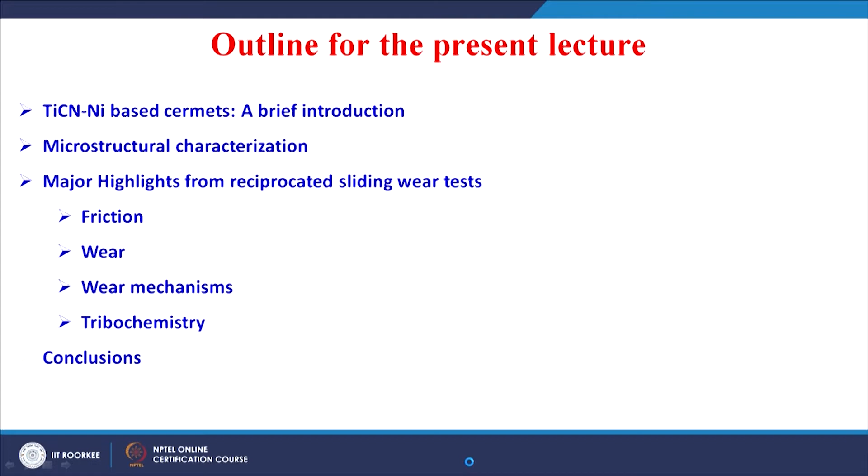So welcome all again. Today we will learn about the salient results of studies done on the tribochemistry of a particular cermet material. The outline of the present lecture: I will introduce titanium carbonitride based cermets with a brief introduction on their microstructural characterization, and then I will focus mainly on explaining the friction results, wear results, the dominant wear mechanisms and the tribochemistry involved in the wear.

Let us start understanding what is this cermet. Cermet is a ceramic with a metallic binder, so it is called a cermet. Several examples of cermets are used in engineering applications, like tungsten carbide cobalt cermet, aluminum oxide nickel cermet, zirconium oxide nickel, titanium carbide with nickel or cobalt, or titanium carbonitride with nickel. These are several examples of cermet materials used in engineering applications.

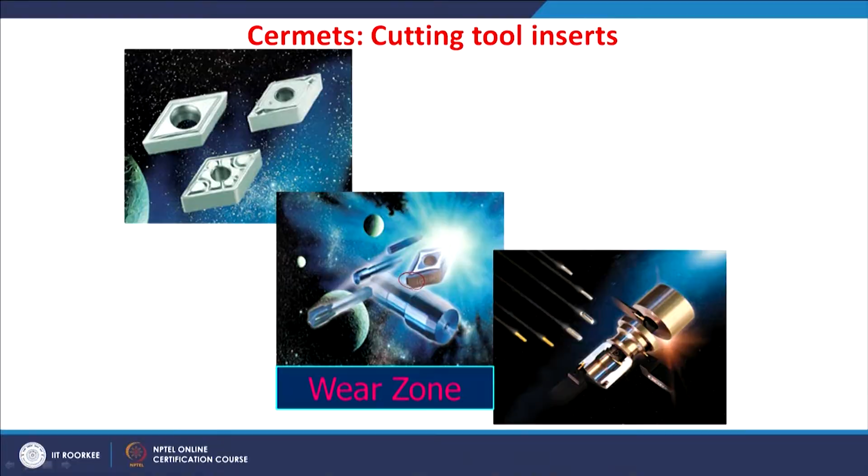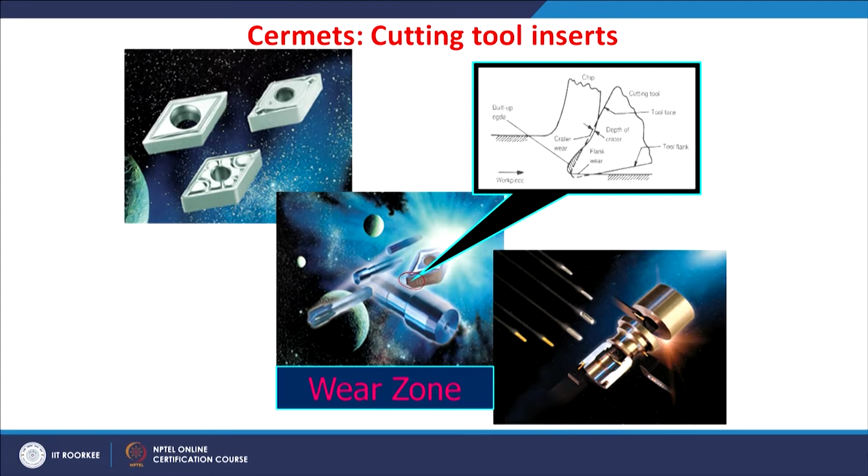Regarding engineering applications, these cermets are mainly used in cutting tool applications as an insert for the cutting tool. In machining, if you look at the tip or nose of the tool and the workpiece, there is a large amount of friction generated. This friction induces wear, but it also induces high temperature. So the friction-induced heat and the damage occur simultaneously and lead to material degradation. Particularly in cutting applications, the mechanisms shall be studied in the crater wear or the flank wear of these cutting tool inserts.

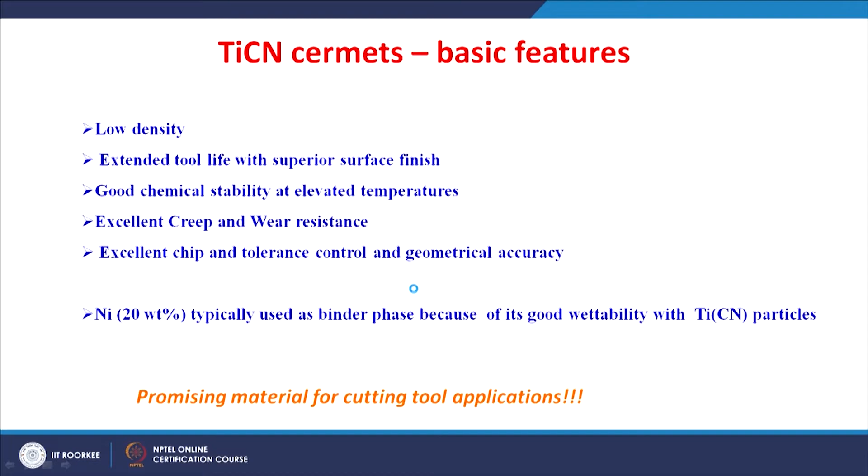Titanium carbonitride based cermets are important because they have lesser density, extended tool life with superior surface finish, good chemical stability at elevated temperature, excellent creep and wear resistance, and excellent chip tolerance control that leads to geometrical accuracy. The market of cutting tools used for machining harder materials is generally dominated by tungsten carbide cobalt. Compared to tungsten carbide cobalt cermet, these titanium carbonitride cermets are attractive because of these properties.

In these cermet materials, the ceramic of titanium carbonitride is attached with a metal, generally nickel, cobalt, or molybdenum. Nickel is generally used as a binder phase because of its good wettability with the TiCN particles. So the ceramic of TiCN attached with the nickel binder as a cermet, titanium carbonitride with nickel, is a promising material for cutting tool applications.

Apart from this binder phase which gives us toughness, there are certain carbides or nitrides also added to improve performance for cutting tool applications. For example, tantalum carbide, niobium carbide, or hafnium carbide are generally used to improve the hot hardness or the thermal shock resistance. When these cermets are added with this combination of carbides, they improve the intermittent cutting performance.

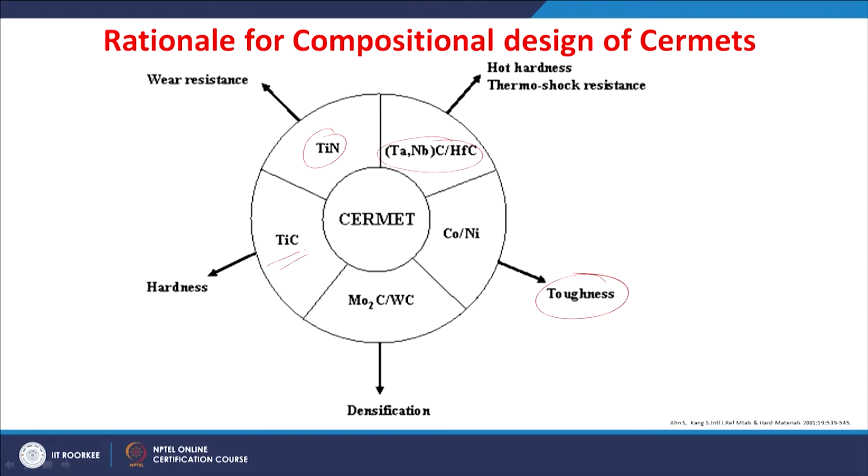Titanium nitride is generally used to improve the wear resistance, whereas titanium carbide is used for improving the hardness. The densification will be improved if you add tungsten carbide or molybdenum carbide. Tungsten carbide is also known to improve the toughness of this material.

So from the compositional design aspect of these materials, it is very important to evaluate and understand the influence of various additions on the wear properties. On this basis, this particular study was done to understand the behavior of these composites, the ceramic with metal composite called cermets, in sliding wear conditions.

For these, cermet materials were prepared by a powder metallurgical processing route. Initially, the powders of titanium carbonitride and nickel, and then respective carbides of tungsten carbide, niobium carbide, tantalum carbide, or hafnium carbide were mixed in a ball mill using tungsten carbide cobalt balls in acetone. These were compacted at 100 MPa, and then these cermet batch compositions, after compaction, were sintered in a conventional way, pressureless sintering at 1510 Celsius for 1 hour under vacuum.

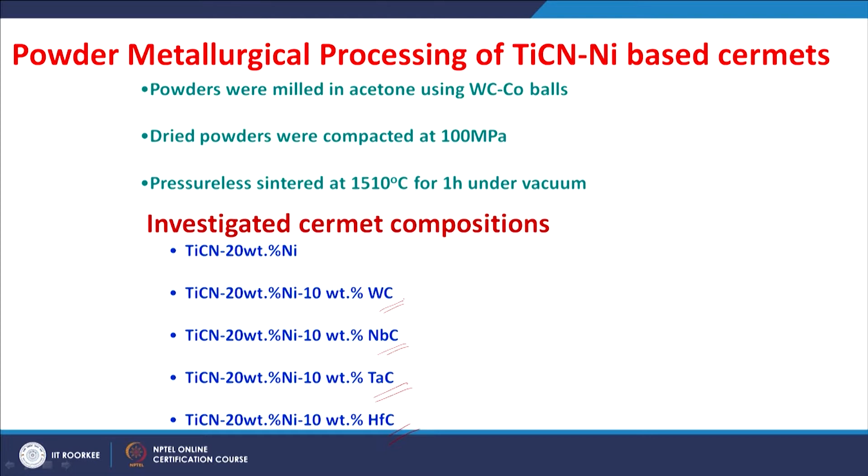So these are the investigated cermet compositions: TiCN with 20% nickel, and TiCN 20% nickel with 10% tungsten carbide, or 10% niobium carbide, or 10% tantalum carbide, or 10% hafnium carbide. So these cermets were studied.

After sintering, the microstructure looks like this. There is a black core region, and then there is a shell generally called the rim region, and then attaching to this the binder phase. The black region is the core, the gray color region is the rim, and the brighter region is the binder phase.

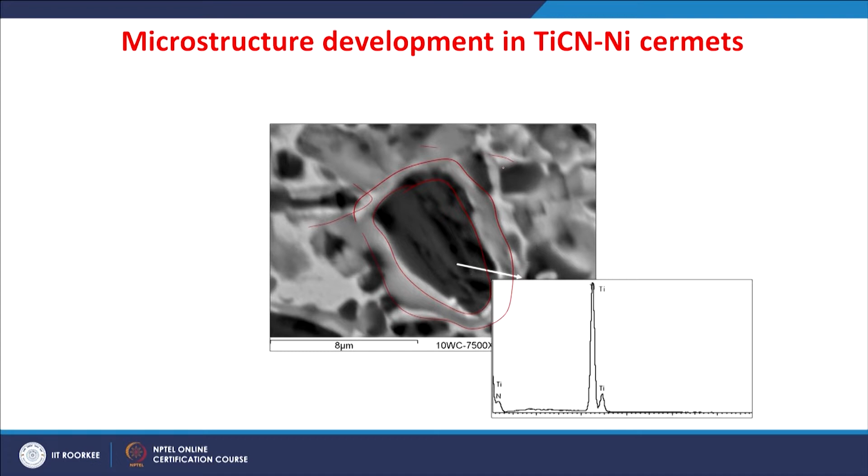EDS analysis of these three different phases indicates the core, which is black, is rich with titanium, whereas the rim region also contains, along with the titanium, the tungsten, and the nickel binder phase, which is a bit brighter in contrast, has nickel and titanium.

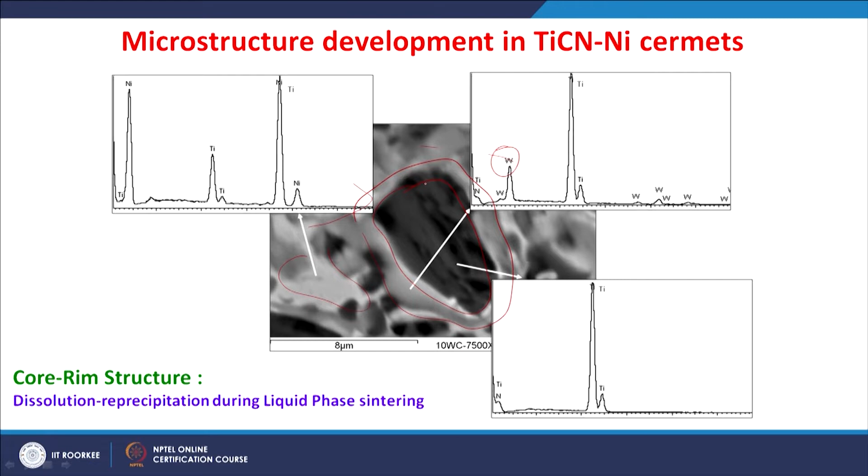So this core and rim structure is believed to develop by liquid phase sintering. When the liquid forms, since nickel has a lower melting point than titanium carbonitride, while sintering these cermets, this nickel melt will penetrate among the particles of these ceramics, titanium carbonitride and the respective carbides.

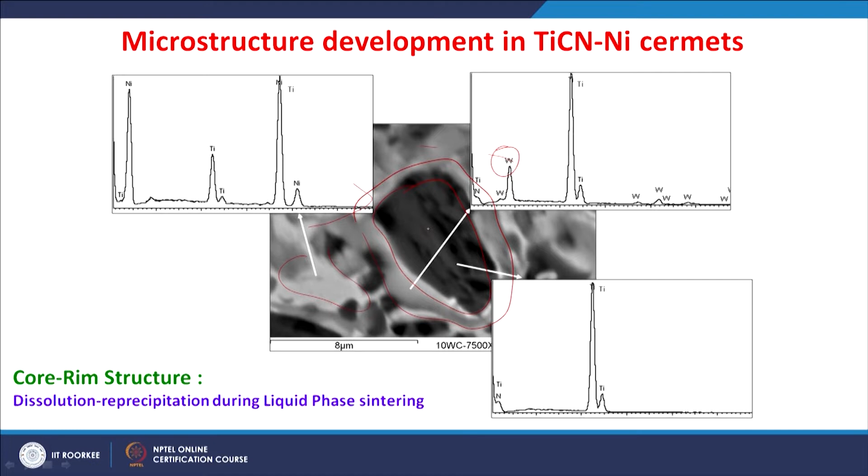The liquid wets the solid particles, and there is a dissolution of the solid, and in the process of sintering there is a precipitation. So, the undissolved portion is a core, whereas the precipitated portion is a rim.

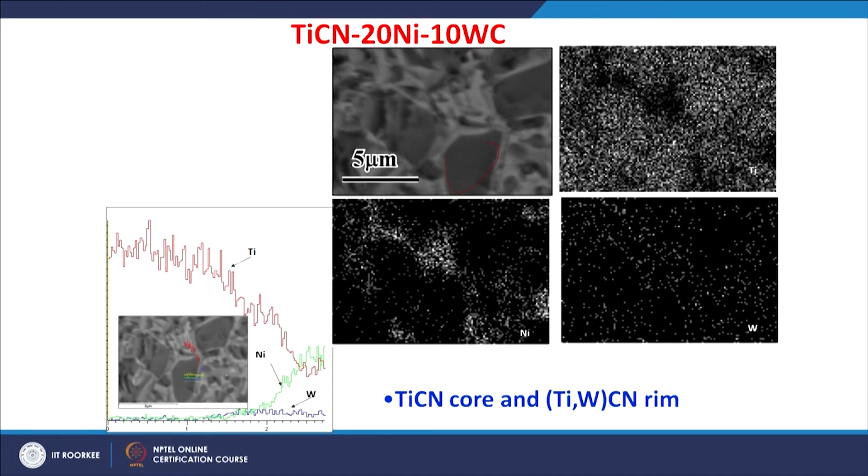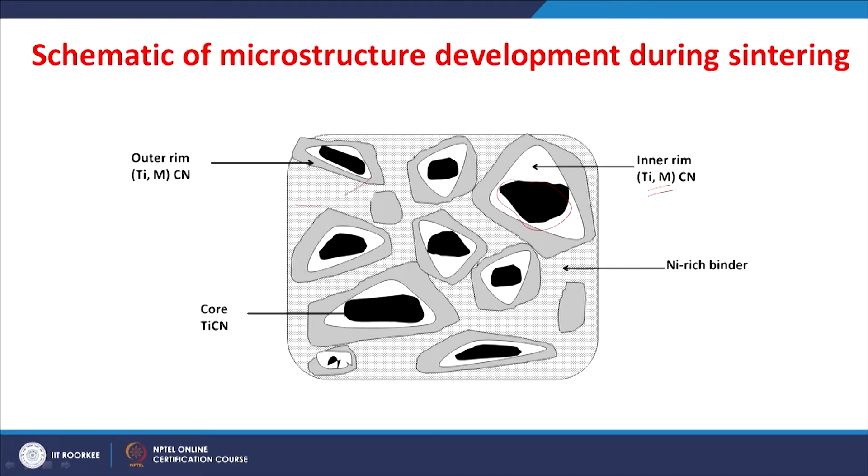There is a core region and the rim region, and the rim region is divided into outer rim and inner rim. Generally, the inner rim is rich with the heavy metal from the added secondary carbides, and then there is the binder region, which is nickel rich.

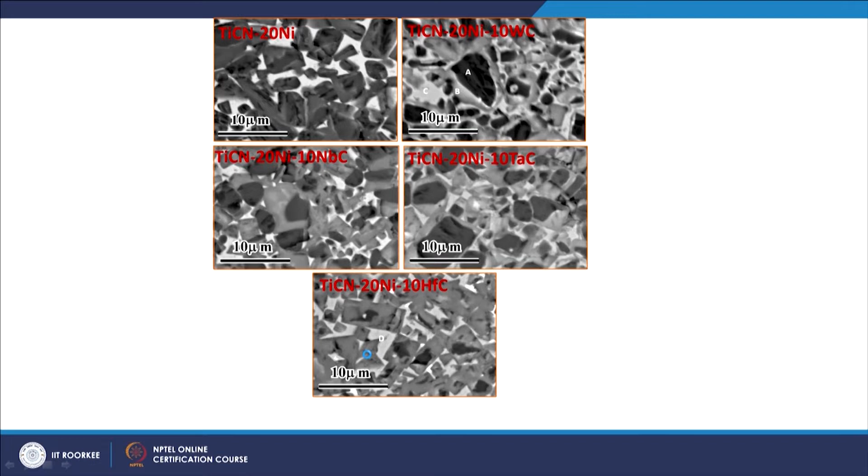This is a collection of the typical microstructures of the investigated cermets. You can see more or less similar features present in the sintered materials, but there is a difference in the frequency of the core or rim phases, as well as the size of these core or rim phases. A systematic investigation using the line intercept method shows a larger core region.

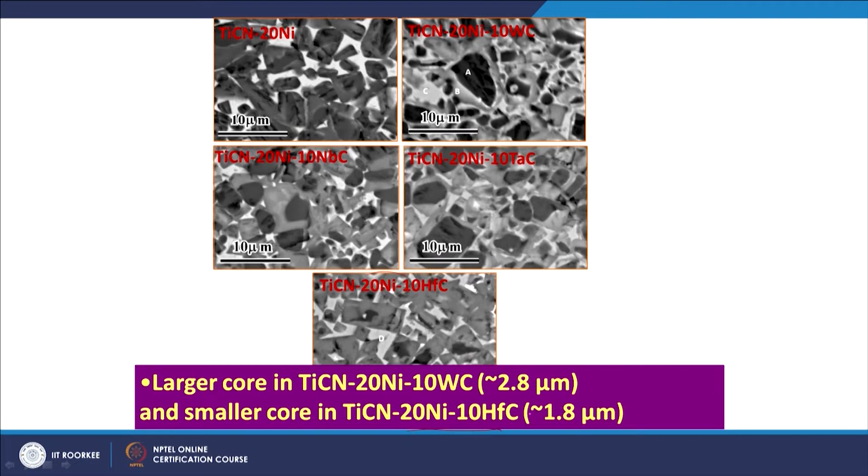The average core region is around 2.8 micrometers in the titanium carbonitride nickel tungsten carbide cermet, whereas a smaller core region is seen in the titanium carbonitride nickel hafnium carbide cermet. So there is an average size difference in the cores obtained after sintering.

This actually reflects on the mechanical properties as well. The hardness ranges from around 9 to 12 gigapascals with change in composition.

More or less, this baseline cermet without having any carbide, and those having hafnium carbide or niobium carbide, have a hardness range between 9 and 10 gigapascals, whereas higher hardness is obtained for cermets containing tungsten carbide and tantalum carbide. Out of them, the cermet with tantalum carbide shows the maximum hardness, followed by the cermet containing tungsten carbide.

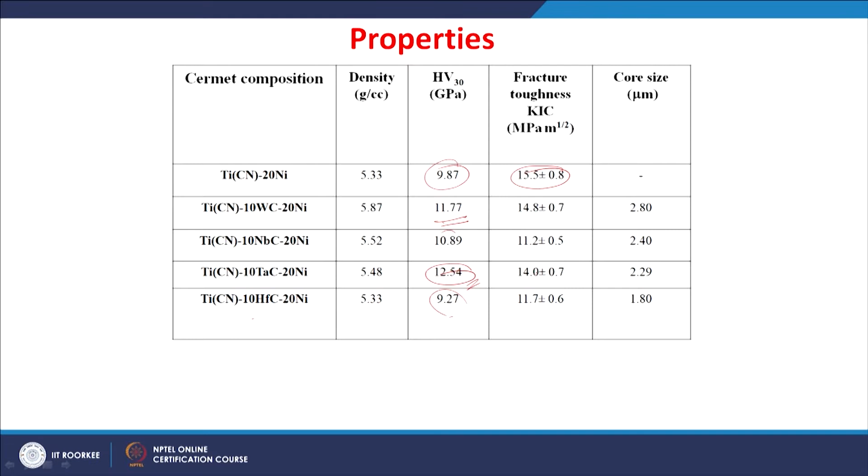The fracture toughness ranges from 11 to 15 MPa root meter. Of course, the maximum fracture toughness is obtained for titanium carbonitride with nickel without any secondary carbides. By adding secondary carbides, the fracture toughness seems to reduce, and out of these cermets with secondary carbide additions, the cermet with tungsten carbide addition and tantalum carbide addition shows the maximum fracture toughness.

With this information, we did some sliding wear tests for the cermets in reciprocated sliding conditions.

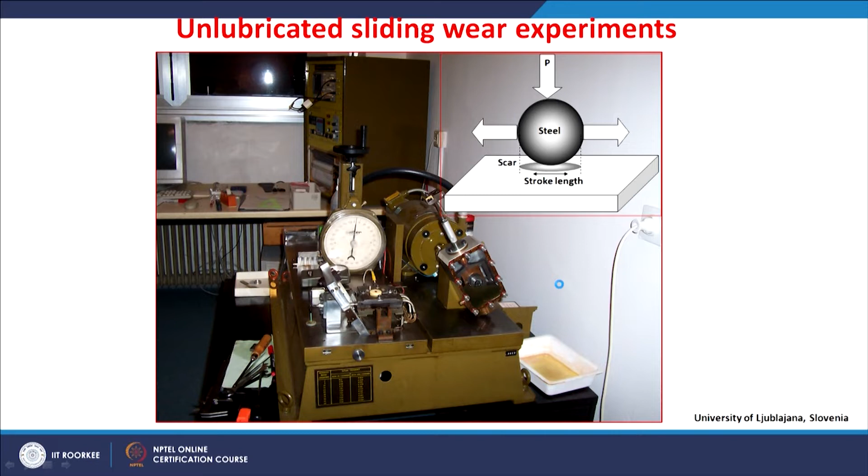As explained earlier, reciprocated sliding gives longer contact time, so the material will be subjected to more wear, and the debris will also be in longer contact, which causes a difference in subsequent wear. For these experiments, we selected a sliding wear tester which reciprocates over a short distance, and these experiments were done at the University of Ljubljana, Slovenia.

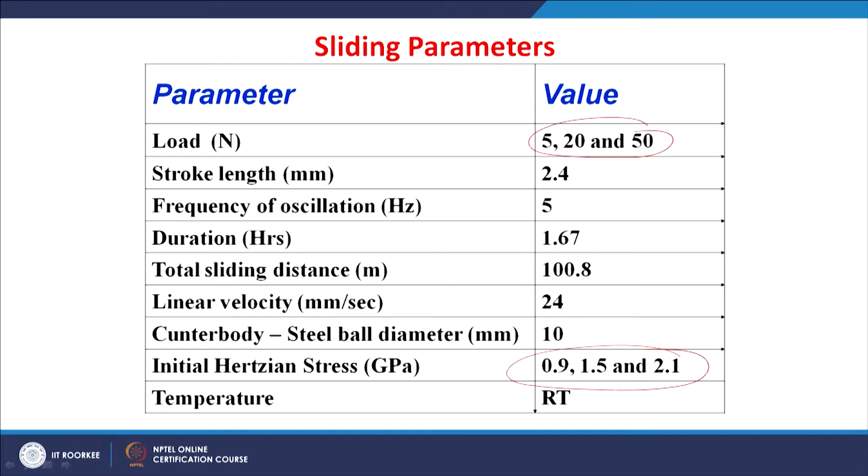The experiments were done for the investigated cermets with changing load of 5, 20 and 50 Newton, which gave an initial Hertzian stress maximum of 0.9, 1.5 and 2.1 gigapascal respectively, with all other parameters kept constant. Let us understand the results obtained from this study.

If you look at the coefficient of friction as a function of number of cycles, more or less similar features can be observed. Initially, the coefficient of friction increases to a maximum value within a few hundred cycles, and then it maintains a steady state until the end of the experiment.

Generally speaking, the coefficient of friction is maximum in the initial stages because of the running-in period behavior, presumably due to the rubbing action of the asperities. Once these asperities are rubbed against each other, a stable contact forms and that leads to a steady state.

This running-in period, as well as the steady state, is observed in all cermets, but there is a difference with respect to the load and with respect to the cermet compositions.

Let us understand with respect to load. The coefficient of friction in the steady state is higher for any cermet at a lower load of 5 Newton, whereas 20 Newton and 50 Newton load conditions gave reduced friction compared to that obtained at 5 Newton, but there is no much difference in the friction obtained at 50 or 20 Newton. So there is a difference in the steady state coefficient of friction value.

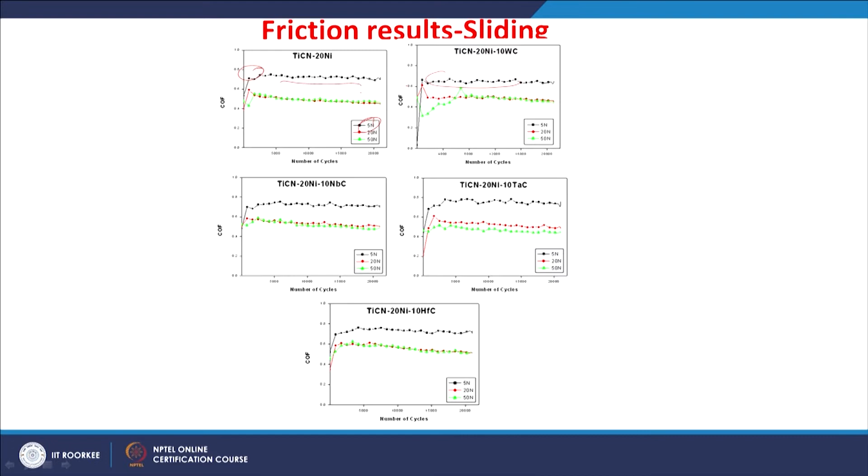The average steady state coefficient of friction is between 0.64 to 0.75 at 5 Newton for the investigated cermets, whereas at higher loads of 20 or 50 Newton it varies from around 0.46 to a maximum of 0.52, but there is not much difference between friction obtained at 20 or 50 Newton.

Among the investigated cermets, even at a lower load of 5 Newton, the minimum coefficient of friction was obtained for the cermet having tungsten carbide, whereas the maximum coefficient of friction is obtained for the cermet having hafnium carbide, or for the baseline cermet.

There is almost no much difference here, but overall, at lower load the coefficient of friction is high, whereas at higher load it becomes less. This indicates two load regime conditions: a higher load at 20 or 50 Newton, or a lower load at 5 Newton, where the friction changes.

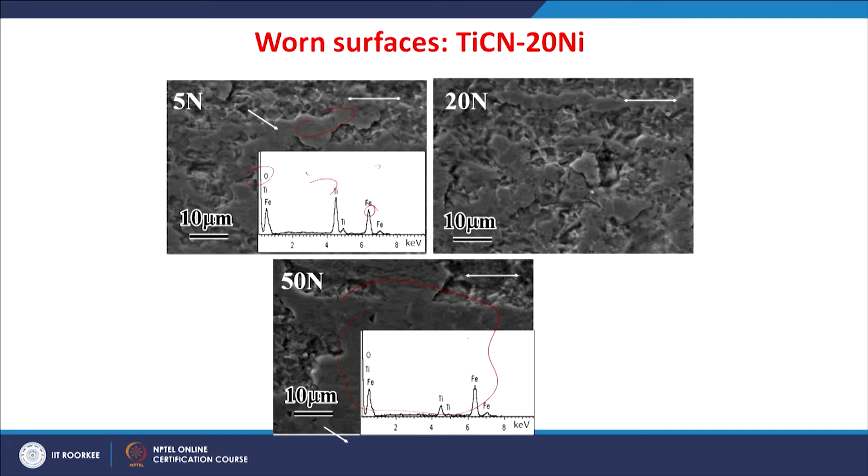The EDS analysis of this layer fragments shows oxides of titanium and iron, whereas at higher loads you can again see oxides of titanium and iron, but a very interesting observation is the titanium peak is reduced while the iron peak is increased. So with increase in load, the iron oxide content is more than the titanium oxide in the layer—there is deformation and onset of tribolayer formation at lower load, whereas dense tribolayer formation is observed at higher loads.

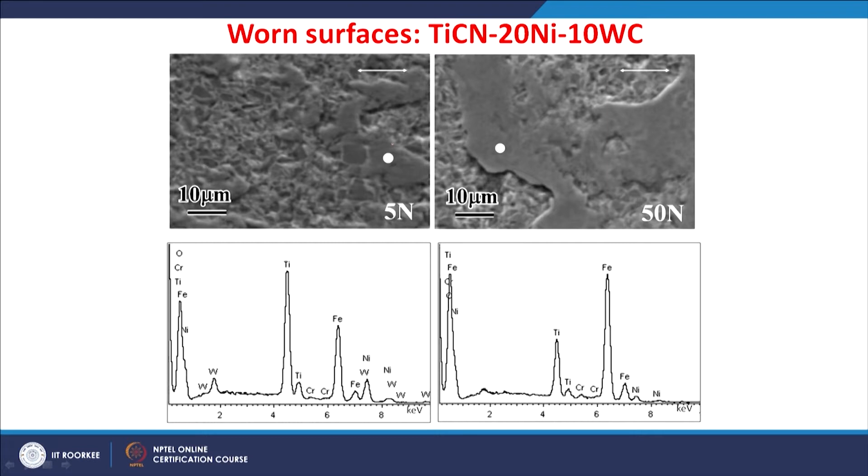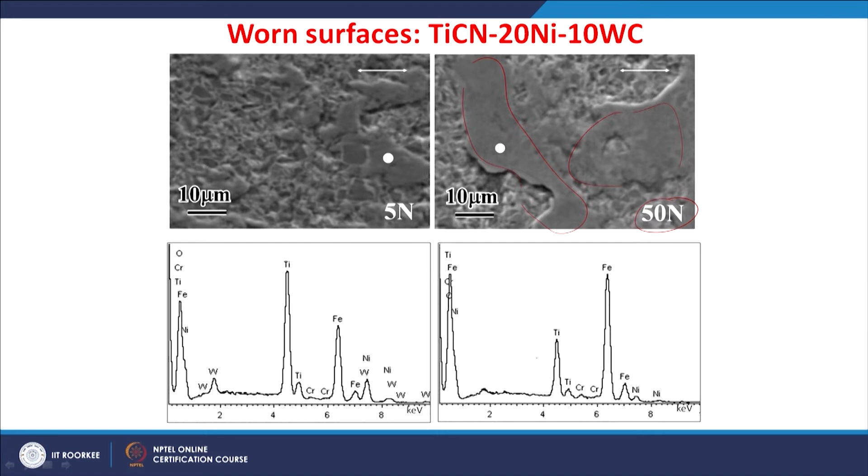The worn surfaces of the titanium carbonitride nickel tungsten carbide cermet shows again at lower load minimal presence of this layer, whereas at higher load you will see majority of the surface is covered by this layer. The EDS analysis shows a similar observation, that they become more rich with iron oxide.

So the increase in the friction induced temperature because of the higher loads, and also the compaction of those debris, result in the formation of such a layer, and this layer actually protects the underneath surface. So that reduces the wear or the friction. So these are the worn surfaces for the titanium carbonitride nickel niobium carbide cermet.

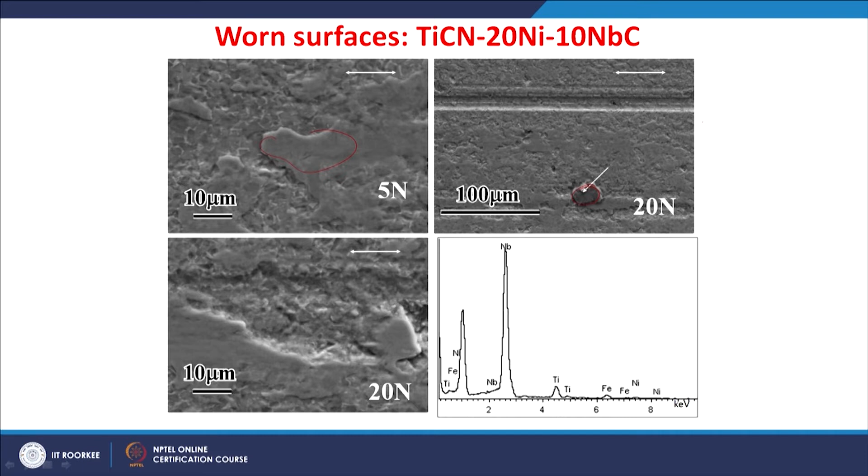You can again see there is a pull out of this material and the signatures of the tribolayer, and also the entrapment of the debris on the layer along with these abraded grooves. So more or less similar features are observed, but in all these conditions the nickel presence is very minimum on the tribolayer. So these are the worn surfaces obtained for the cermet after sliding at 5 and 20 Newton.

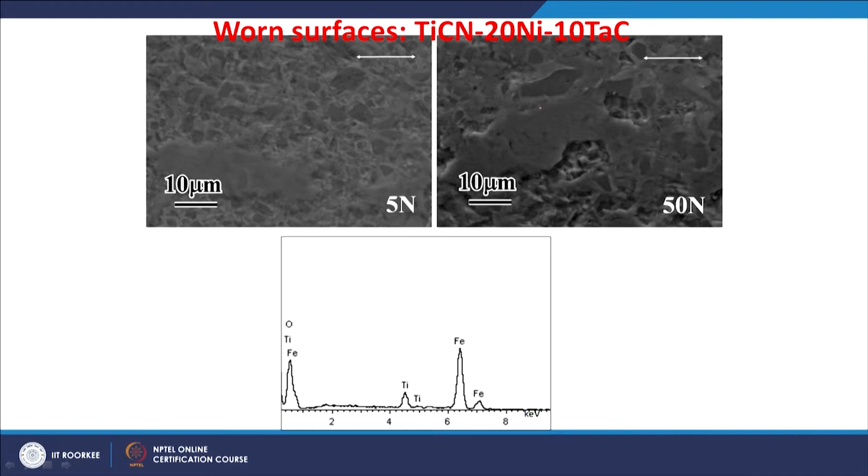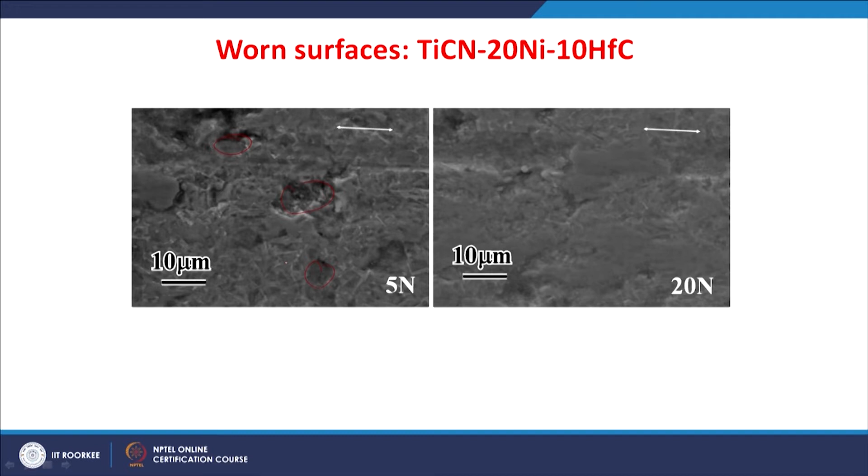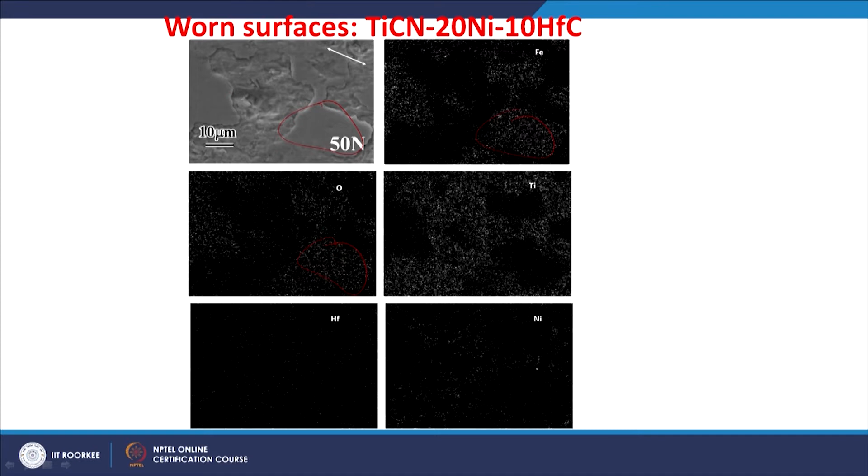The cermet was titanium carbonitride nickel and tantalum carbide. Again it shows the coverage by the tribolayer at higher loads. The hafnium carbide containing cermet shows very severe pullouts and cracked material, whereas at higher loads there is a layer formation. The X-ray mapping of these cermet materials after sliding at higher load also indicates this layer is rich with iron and oxygen, whereas these layered areas are not having any nickel, hafnium, or titanium.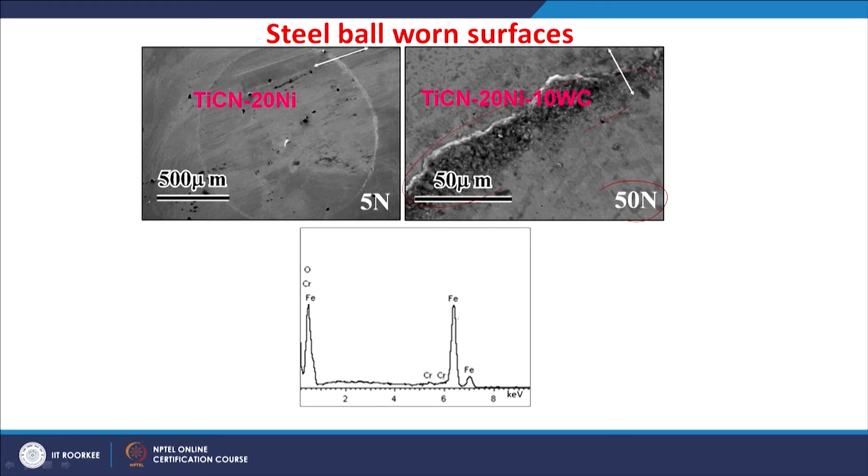The counterbody surfaces also show this tribolayer formation at higher loads. Again these are the signatures of this layer formation, and the counterbody is also rich with iron oxides, whereas the wear results for the counterbody steel ball show almost similar features. With increase in load there is a decrease in wear, but a very important observation is that the cermet having the highest hardness, which showed the lowest wear at lower load, showed the highest wear for the counterbody. So though the baseline cermets actually showed lesser wear than this one.

So let us understand this in more detail by analyzing the debris. These debris were collected for a different cermet having a larger amount of tungsten carbide and subjected to the same sliding conditions at 50 Newton. These debris were collected carefully after sliding, and then subjected to EDS and X-ray diffraction analysis.

You can see the shape of the debris is like a platelet, some very small and irregular in size and shape, whereas some are shaped like plate-like debris. EDS analysis again shows rich iron oxide or titanium oxide with a minimum amount of the respective elements from the carbides, but the X-ray analysis of these debris shows the dominant presence of oxides of iron or iron titanate.

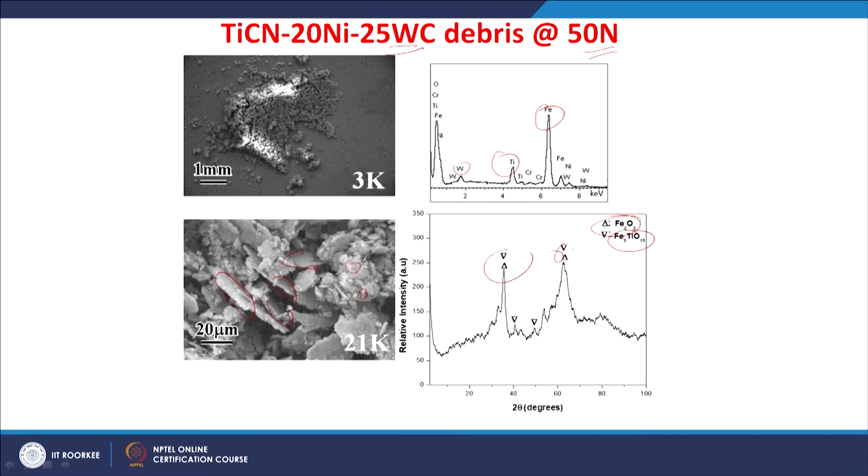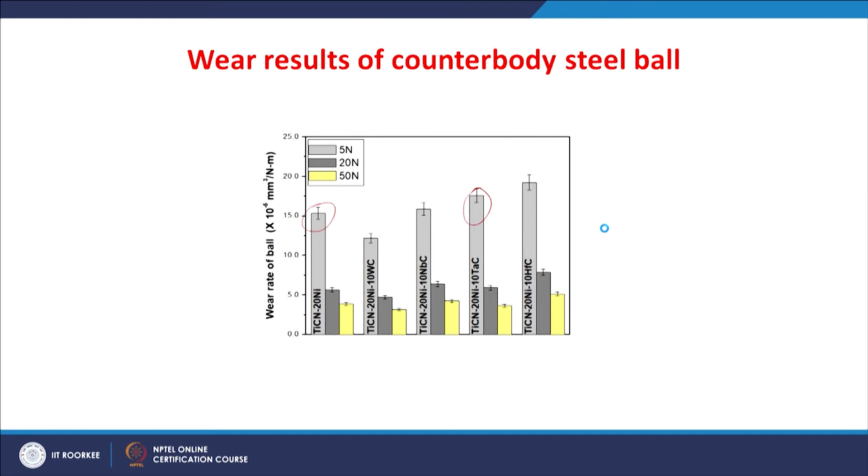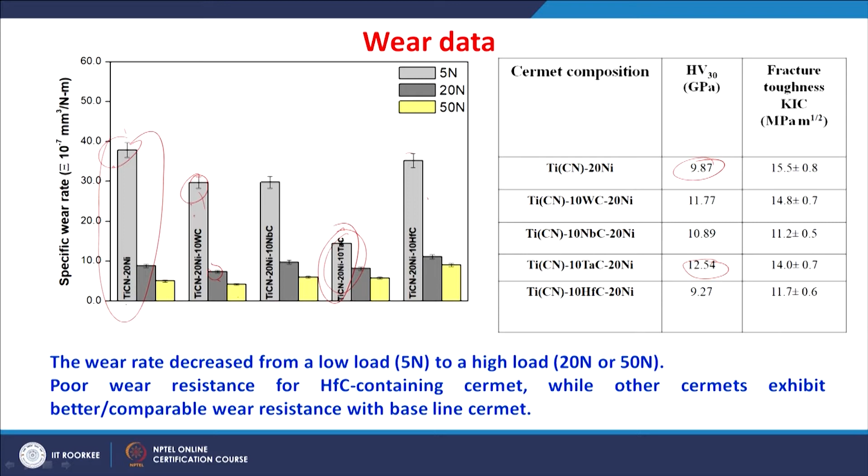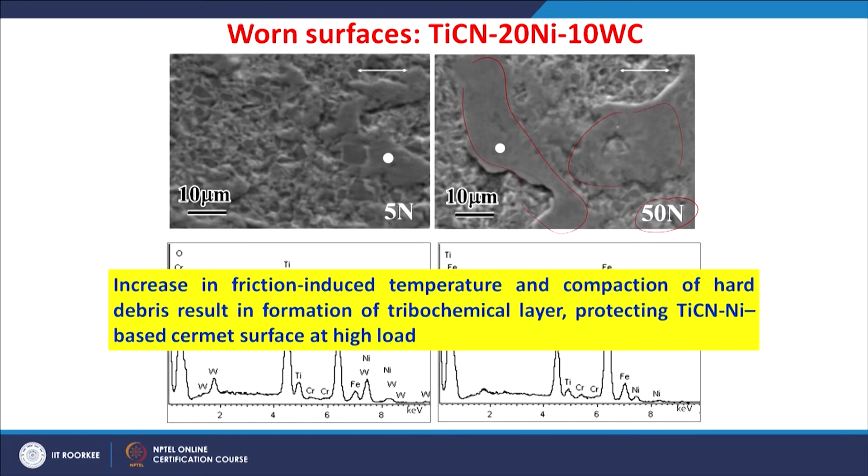So all these results can be understood by the tribochemical reactions. The very important observation so far is at lower loads the friction is high and at higher loads it is less, and similarly at lower loads the wear is high and at higher loads the wear is less. So at higher load there is a domination of the tribolayer, whereas at lower loads it is more or less the removal of material by mechanical fracture. So it is now understood that at lower loads it is only the mechanical aspect contributing to the wear, whereas at higher loads it is the tribochemical layer.

So generally what happens in the initial stages of sliding is, due to the difference in hardness between the steel ball and the cermet, with the cermet having higher hardness than the steel ball, the steel ball wears out easily, and then the elements from the ball, iron and chromium, get oxidized, because all these tests were done in ambient conditions. So there is a chance that iron oxide or chromium oxide will form.

So as the sliding is continued, these hard debris of iron oxide or chromium oxide will abrade the cermet material as well. So we saw some signatures of abrasion and the entrapment of this debris. This abrasion leads to removal of material from the cermet surface, and this material removal results in the oxidation of these elements from that material.

So we will have oxidation of the elements, for example titanium gets oxidized, tungsten is oxidized, niobium is oxidized, tantalum is oxidized, hafnium oxidizes, nickel oxidizes. So the oxidation of these cermet elements is possible in the continuous sliding process. Initially iron oxide is formed, then this hard iron oxide abrades the cermet surface, and the elements from the cermet surface also get oxidized, forming oxides on the surface. But at higher loads, these oxide debris get mixed and then compacted to form a tribolayer.

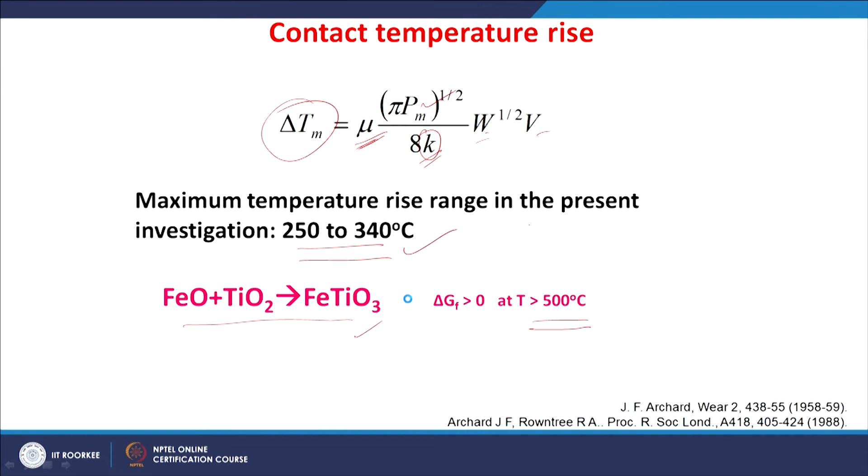So it is now very clear that the formation of these oxides on the surface leads to a mixture of iron oxide and titanium oxide, and then leads to iron titanate. This iron titanate is thick and also viscous in nature, and it actually facilitates the sliding. So friction is reduced because of the coverage of this layer, and the material removal is also reduced.

All these conditions indicate the formation of the layer and the removal of the layer at higher load. That means the tribochemical layer formation and the removal of such a tribochemical layer dictates the wear behavior. So our results show that the iron titanium oxide rich layer formation is beneficial in reducing the wear and the friction for this material.

The friction behavior can also be understood by a crystal chemical model proposed by Erdemir. As we have seen, there is a chance that several oxides are formed on the surface at the contact. Oxides with higher ionic potentials possess greater shielding of the cation by the surrounding anions, so the cation has little or no chemical interaction with other cations in the system.

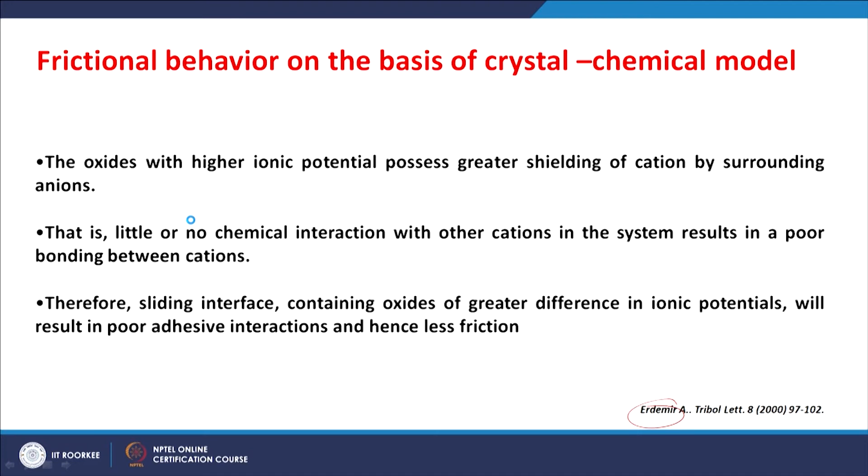So the sliding interface which is rich with oxides having a larger difference in ionic potentials will result in very poor adhesive interactions, which actually contributes to lesser friction. Based on this, we again understood the steady state coefficient of friction with respect to the possible binary oxide combinations during sliding and the difference in their ionic potential.

You can see the formation of these possible oxides, like iron oxide or titanium oxide, are possible with the baseline cermets, whereas in addition you have iron oxide-tungsten oxide or titanium oxide-tungsten oxide combinations also possible in this particular cermet. So we have listed down the possible binary oxide combinations during sliding of these respective cermet materials, and the difference in their ionic potentials are also listed.

Now you see here, particularly at the lower load conditions, higher the ionic potential, lower is the friction coefficient. You can see higher ionic potential gives lower friction coefficient, and lower difference in ionic potential gives higher coefficient of friction. But actually this behavior is not observed at a higher load regime.

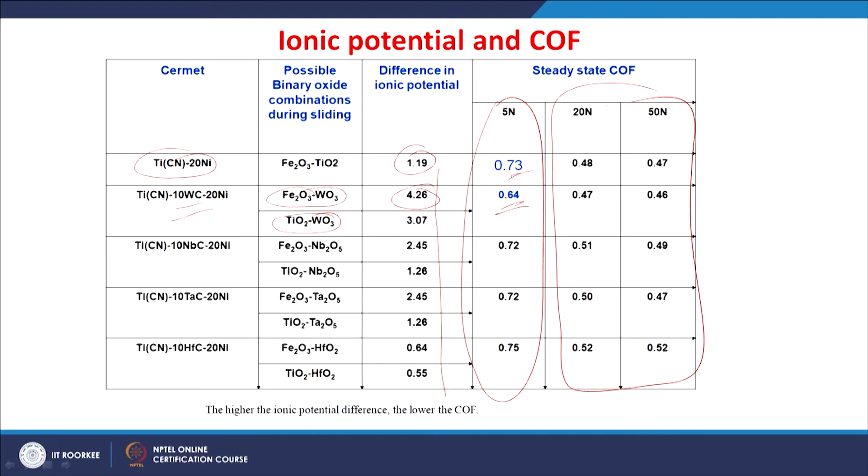That indicates whenever the wear is dominated by mechanical aspects—abrasion, pull out and fracture—then you have the effect of these oxides and the respective difference in ionic potentials on the friction behavior. Whereas at higher load, the surface is completely covered with a tribo layer rich in oxides, particularly iron titanium oxide.

So it actually happens like this: the surface is filled with oxide, and the friction or sliding is going on between the layers of these oxides. The actual contact between the steel ball and the cermet surface is lost; it is only between layers of these oxides. So you do not have any influence of this difference in ionic potential at higher loads, where there is domination of the tribochemical layer formation.

So, overall putting this as a summary of these sliding wear mechanisms: at lower loads there is a lot of abrasion and debris, which leads to oxidation of this debris, and there is an onset of such tribo layers. But this layer becomes dense, covering the entire worn surface, and is rich with iron titanium oxides. So the layer is cracked and removed. Mainly the wear occurs at higher loads by removal of this layer rich with iron titanium oxide, whereas at lower loads the wear is more dominantly by abrasion, cracking or pull out of this material.

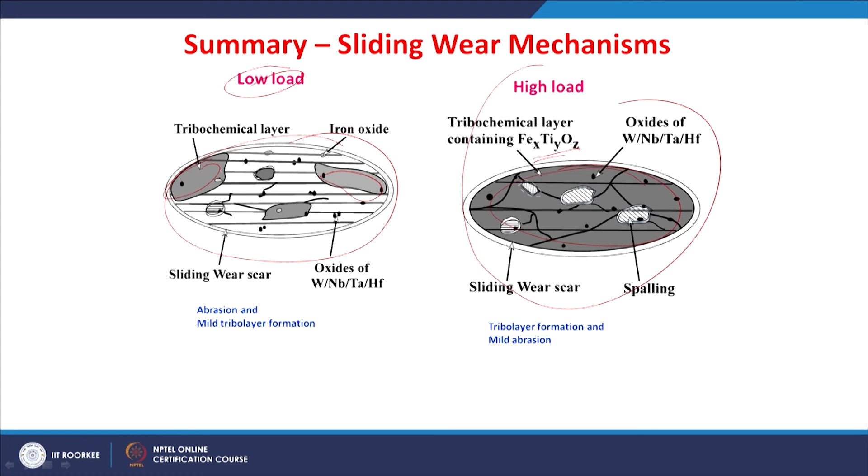So the process is like this: in initial conditions of sliding, the deformable nickel binder phase comes out, smears out and deforms, followed by cracking of the ceramic core and rim phases. At lower loads, abrasion is dominant; at higher loads, oxidation of this debris leads to a compacted layer rich with iron titanium oxide, because it fills the entire surface and reduces further wear from the underneath surface.

So the overall conclusions from the present study: at lower loads, the friction and wear are influenced by the microstructural constituents of these titanium carbonitride nickel based cermets. At lower load, that is at 5 Newton, the formation of abrasive oxides of these transition metals is dominant, resulting in higher friction. Also, the chemical characteristics of various possible oxide combinations dominate the friction at lower loads.

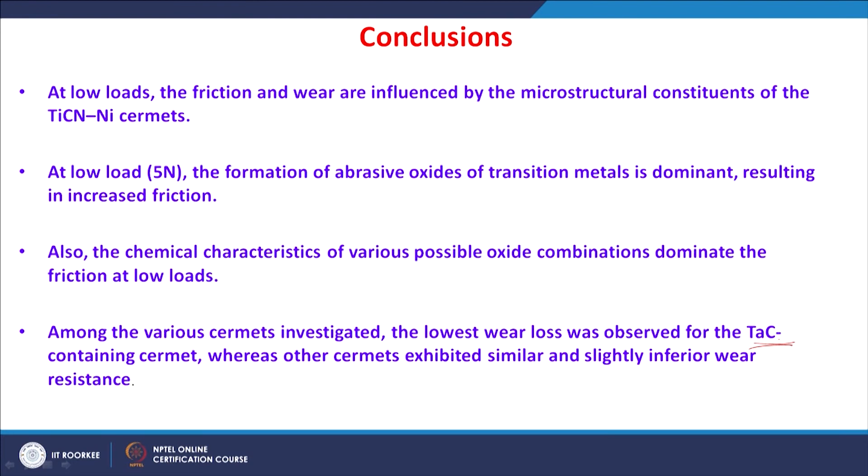Among the cermets investigated here, the lowest wear loss was observed for the cermet containing tantalum carbide, whereas other cermets exhibited similar and slightly inferior wear resistance. Regarding the mechanism, at lower load the abrasion and mild tribo layer are predominant. However, the formation of a dense tribochemical layer rich in oxides of iron and titanium is responsible for the reduction in friction and wear at higher loads.

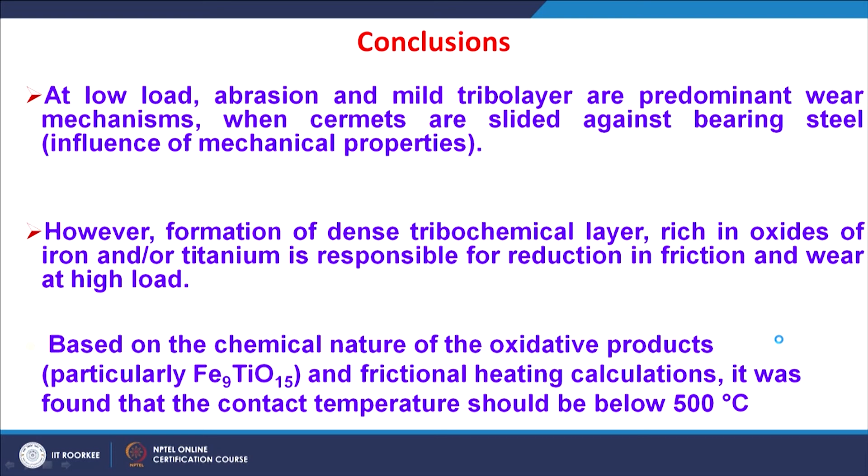Based on the chemical nature of these oxidative products and frictional heating calculations, it was found that the contact temperature should be below 500 Celsius. So one of the important observations from this study is that friction and wear properties do not exhibit any direct correlation with the mechanical properties. Remember, it has a hardness influence only at lower load conditions; at higher loads there is no such relation.

So when tribochemical layer is formed, you do not have such a relation with the properties, because the contact surface is actually covered by this tribochemical layer. That means when tribochemical layer formation is dominant, you do not have any relation at the interface of the investigated tribocontacts. So this particular study highlights the evolution of the tribochemical layer that has a relation with the contact temperatures. For the given cermet composition and sliding wear conditions, the tribochemical layer evolves.

So it is a very important study from the application point of view. You have to identify the cermet composition and suitable sliding wear conditions, so that these cermets can be preferred for tribological applications, for example these cutting tools.